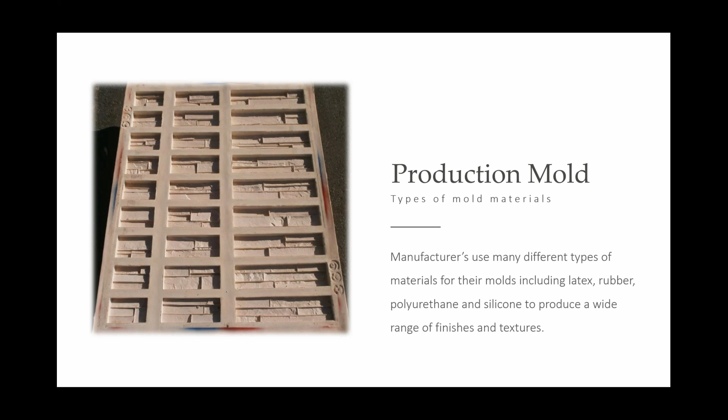After we make the mold, we apply some type of color to the mold, and that color is a pigment, an iron oxide pigment. Sometimes that's a liquid, sometimes it's a powder, and sometimes it's a combination of both. That can be either hand applied, like what you're seeing here in the picture, typically done for more of a realistic or artistic look, or it can be done by a computer or a hand sprayer, just depends on the manufacturing process that the particular manufacturer has in production.

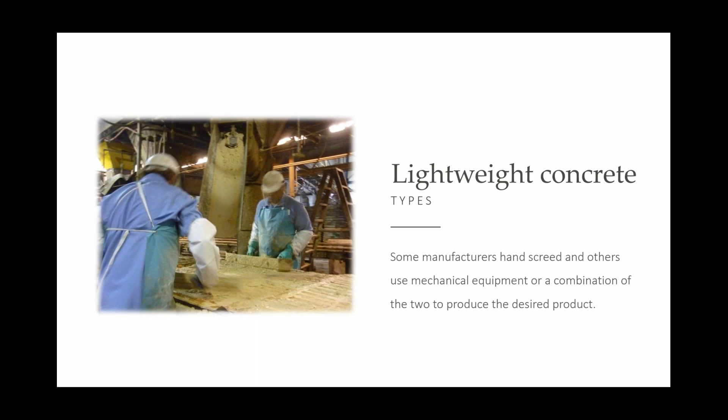After we do that, we apply our lightweight mix of concrete, and then it gets screeded either by hand, by machine, or by both. And that gives us our finished product, in this case a piece of panelized manufactured stone veneer.

Stone types - there are many different types of stone out there, especially in manufactured stone. We are able to create some looks that you can't get with natural stone. As you see in the pictures, we can manufacture anything from individual stones to panelized systems to large formats, and even the very popular brick looks.

So, manufactured stone versus natural stone. Depending upon what part of the country you're in, manufactured stone veneer is typically going to cost less than natural stone when it's put up into the wall. That may not be the case if you're sitting right next to a quarry in terms of raw materials, but by the time you install it by the proper methods, it's typically going to be more than manufactured stone up in the wall.

Manufactured stone is more streamlined, and it's a more cost-efficient installation with regards to waste factor. There's not as much scrap on manufactured stone because pretty much every piece of material that comes out of the box gets used, whereas in natural stone, not everything gets used. Manufactured stone veneer typically goes up faster than natural stone, simply because you're fitting natural pieces as opposed to something that we manufactured.

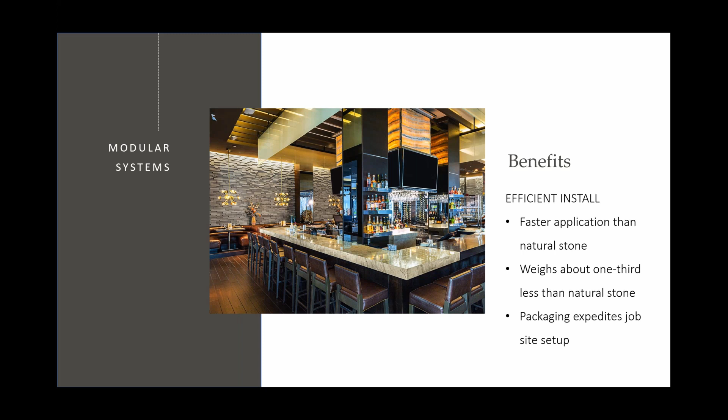Accents and details: when we're comparing manufactured stone to natural stone, there may not be as many accent and detail pieces available for natural stone. So manufactured stone has come up with all kinds of sills, caps, and electrical outlets and boxes, especially for commercial applications, to give that finished look. All of these pieces can be used in commercial and residential applications.

Quality in manufacturing: when we manufacture our own products as manufacturers, we're able to control that manufacturing process. Packaging becomes important because manufacturers want to make sure the packaging is part of your materials specification. This ensures that stone arrives to your job sites intact and ready to go. You can also specify in your specifications, if you'd like, either small or large box quantities based on your job site conditions.

When comparing some materials that are out there, and comparing some manufactured stones to others, sometimes you'll get rust spots where the aggregate quality control was not controlled properly by the manufacturer. You want to make sure you're working with a well-known manufactured stone producer who's got quality controls in place.

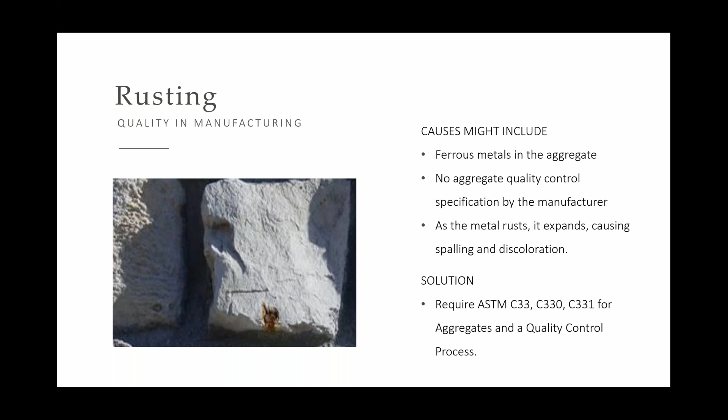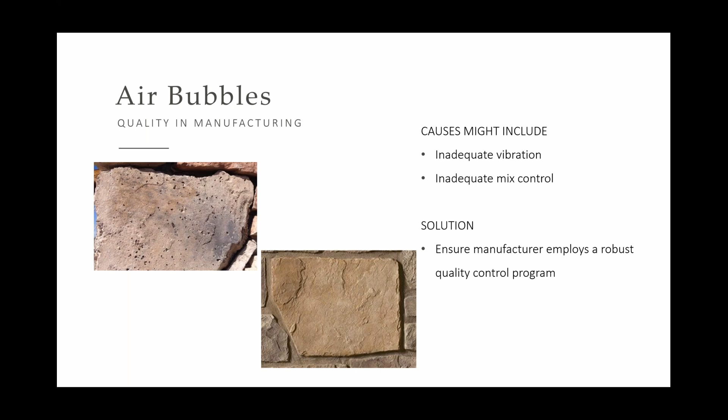The solution there is to make sure that you have quality controls in place, and work with a well-known manufactured stone veneer company. Some other things to look out for: lower quality manufacturing processes.

Sometimes this is regional instead of national manufactured stone veneer companies - they don't have the same number of molds. So when we looked at those production molds earlier in the presentation, the more production molds you have, the more ability you have to create more individual looking types of stones for a more natural and authentic appearance.

Make sure that when you're specifying your projects, you request confirmation from a manufacturer that they've got availability of a large number of master mold fleet.

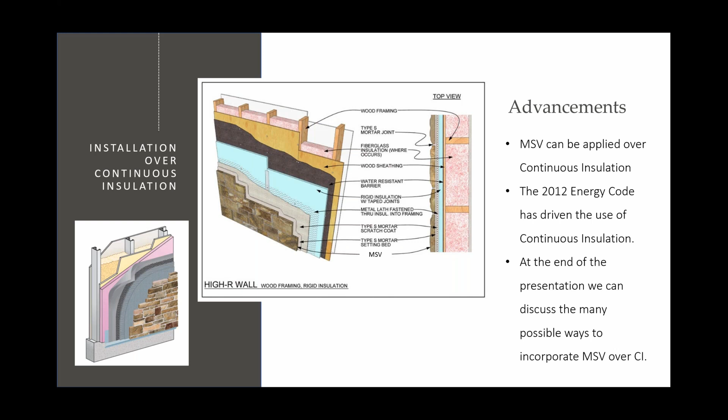When designing for success, we also look at how manufacturers are adding more recycled content. We're pulling materials regionally, as close as possible to the manufacturing plant. Many plants use reclaimed water and low emitting materials. As manufacturers, we're doing what we can to create products that are healthier for the environment, have more recycled content, and are better overall in quality.

Let's take a look at some of the building codes. We always refer to the NCMA MSV guide—that's the National Concrete Masonry Association's guide. If you haven't seen it, you can pick one up through most manufacturers' websites or directly from the NCMA.

This guide covers all the different ASTM codes you need specified within your commercial projects. It has detailed drawings for pretty much anything, from flashings to how to install different products side by side, and all those little details you'll need. I'd suggest grabbing one of these NCMA guides—you can download it right to your computer and keep it there for whenever you need it.

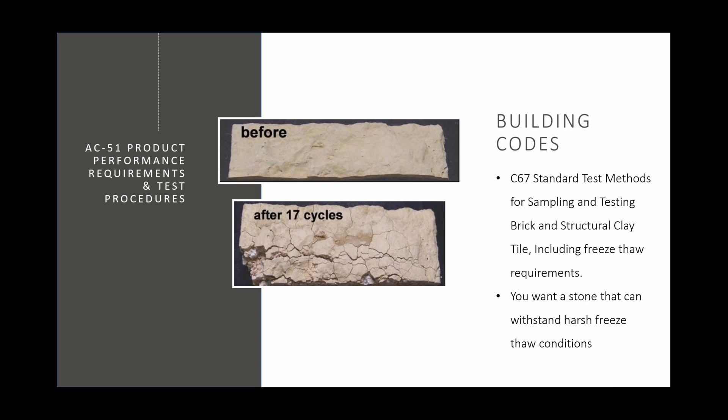Every fantastic piece of manufactured stone veneer out there from a national company, and even some regional companies, will have products that can withstand harsh freeze thaw conditions. We sell manufactured stone veneer all across the United States and Canada that will meet these requirements and withstand snow, ice, rain, etc.

So make sure that when you're out there specifying, include that AC 51 within your specifications.

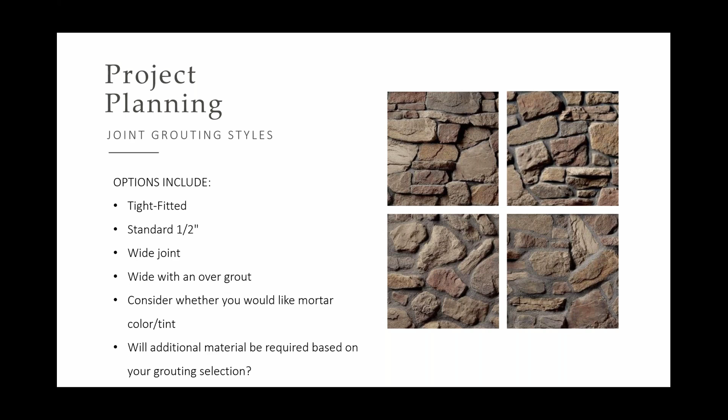Keep in mind that stone direction can also change the look of a project. You can have a random placement of individual stones, or you can lay that exact same material horizontally, and it creates a completely different look. This is all up to you guys to decide and make sure that you've included it within your specifications.

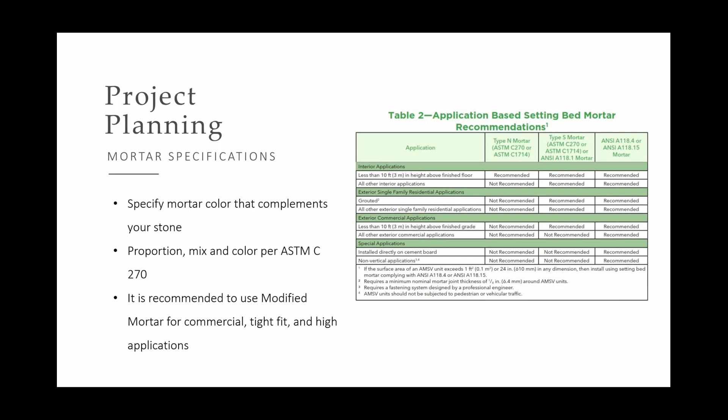When you're planning your projects, it's really important to include the types of mortars that you want. Right now, our requirement is to have a mortar that meets a minimum of ASTM C270 — that's your type N and your type S mortars. We'll talk a little bit more about mortars in further detail, but we want to make sure you're including ASTM C270 for all of your applications, or even better.

The importance of a mock-up. When you guys are project planning and putting things together, we can't stress, as a manufacturer, the importance of a mock-up. It can be a small mock-up or an extremely large mock-up, but it's a good idea to have one on the job site, even for large residential projects. It gives you an idea of the material, the terminations, where the grout is going to be, how thick that grout is going to be, the colors of the grouts. All of these things can be determined ahead of the project so we know exactly what the end result is supposed to look like on the job site, so the general contractor or the builder knows exactly what the finished product is supposed to look like.

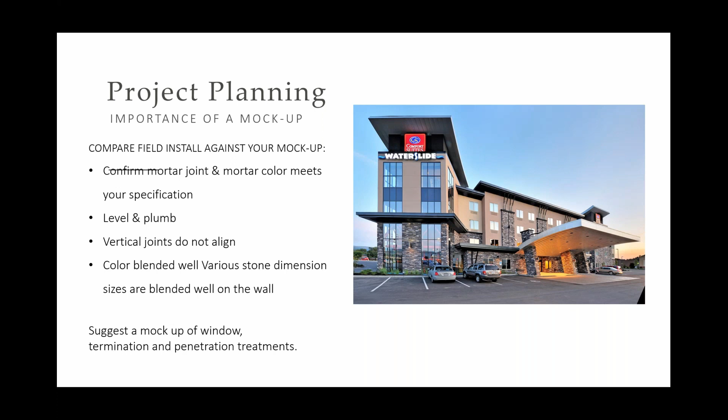It's a good idea to have the mock-up because we can look at the penetrations, we can look at the terminations, we can look at flashings — we can check and see all of these things ahead of time so that we can have a proper installation.

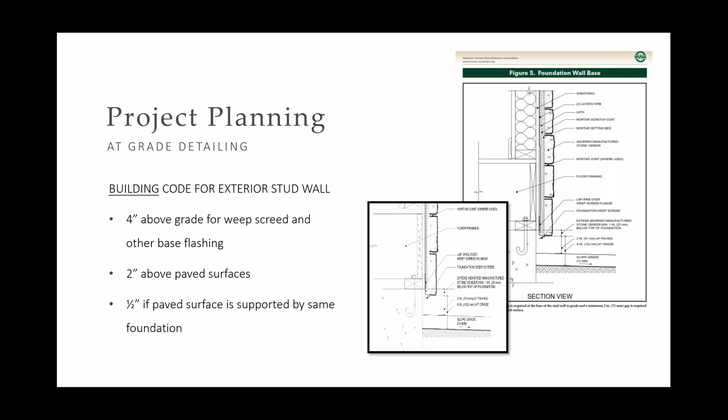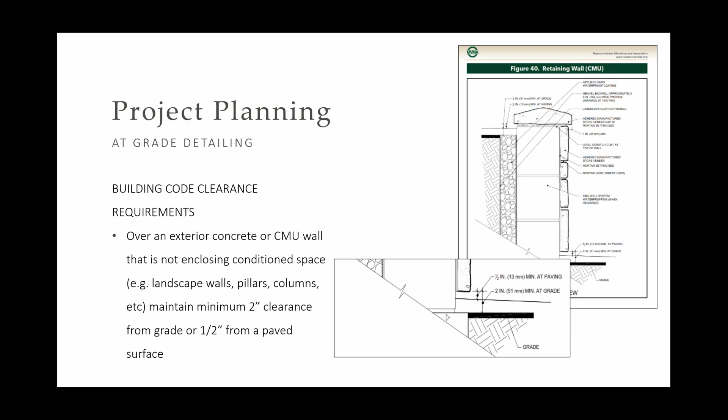Another thing for your specifications, and for general knowledge when project planning: we want to make sure that our stone, if it's going to be above grade, includes a weep screed with a minimum of 4 inches to grade, or 2 inches above a paved surface. We can get away with a half inch if the paved surface is supported by same foundation — more on that in a few minutes. We want to make sure we've got these in the specifications so we know the end result is going to be per code, and that we've got that clearance.

This is an example of a termination at a foundation wall or a bump wall, where we can get away without having to take the stone above that 4 inch or 2 inch clearance to grade, and it allows you to get that concrete-type look with your stone.

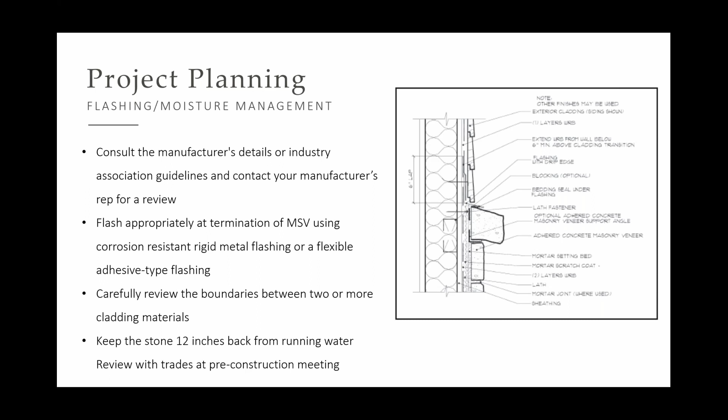This is some detailed drawings showing the flashing and tie-ins needed on a particular project — an idea of how we manage that moisture. All of these drawings can be found in the MVMA guide I mentioned earlier.

Some other considerations for project planning: sometimes people want to put sealers on stone. We don't recommend a sealer, but if you want to use one, make sure it's the right sealer, and we recommend checking with your particular manufacturer, because some manufacturers won't let you seal their materials at all. Efflorescence — certain products have efflorescence at certain times of the year because moisture is pulling back through the wall and through the face of the stone, depositing that white substance you sometimes see on the outside of brick or manufactured stone veneer.

Installers. Sometimes installers are very important to the project planning portion of a particular project, and then long-term maintenance, specifically in retail or national account situations.

When we're talking about protective treatments, sometimes people want to use those because they can increase resistance to stains, but they may also darken the color and slow the water penetration back out through the face of the stone. Our stone as manufacturers needs to be able to breathe on the wall so that when it gets wet, that moisture can evaporate back out through the front of the stone.

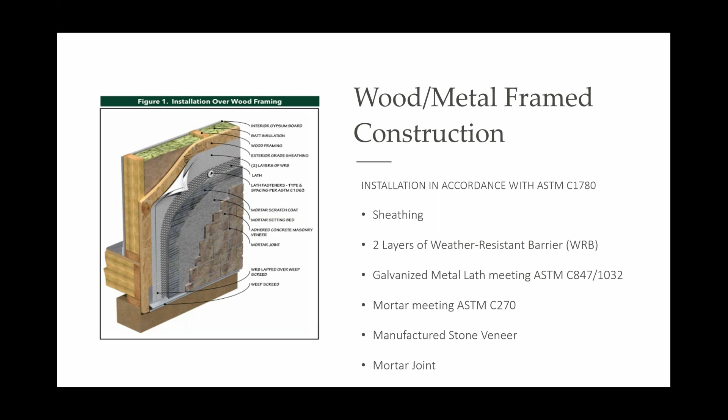When we talk about basic installation, there's some things we need to follow, and that is again ASTM C1780. We're going to have some type of sheathing on the back, two layers of a weather resistant barrier, our galvanized metal lath that's going to meet an ASTM C847 or an ASTM 1032 requirement, and mortar that meets ASTM C270. Then we're going to apply our manufactured stone veneer to that, and then we're going to mortar that joint. This is a fairly typical wall detail that you might include in one of your drawings.

Something that's not usually included in the drawings, but that is highly recommended and something for you guys to know when you're out on a job site checking an installation, is that we need to run our metal lath in a particular fashion. We need to run it horizontally, not vertically. We want to overlap our corners like you see in that picture by at least 12 inches so that we can tie into the framing. We also want to make sure that we're anchoring that metal lath 6 inches vertically and then every 16 inches on center into that particular metal or wood stud.

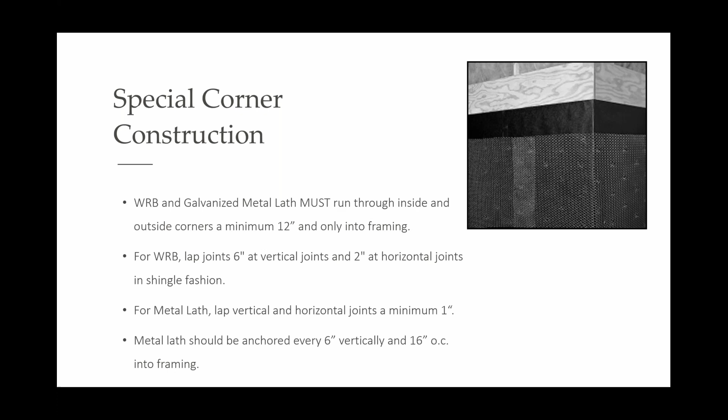So this is a pretty typical installation that you'd see on a corner, and one that you should find out on your job sites.

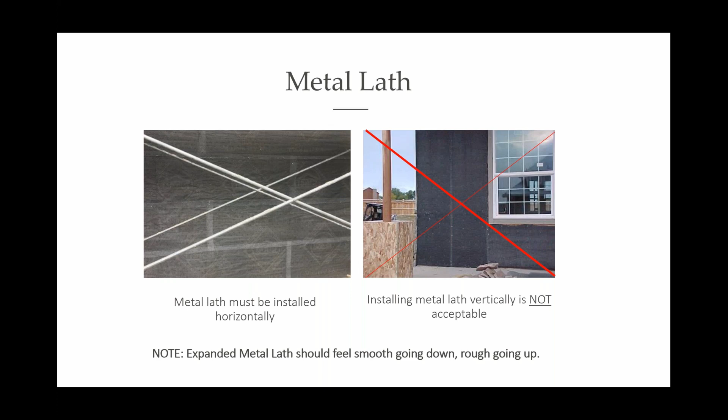You've got spacing also in between those gaps. Your metal lath should feel smooth going down when you rub your hand over the top of it, and rough coming up because it's got those cups in there. Those cups are designed to hold our half inch layer of mortar.

So, weather considerations when we're out there installing: we want to make sure that when we're working in hot and dry climates, our scratch coat is misted with a fine spray of water. That's going to help our mortar not flash off too quickly.

In terms of cold weather, we want to make sure that we're installing our projects in temperatures that are not below freezing or very close to it. So right around 40 degrees Fahrenheit, which translates to about 4 degrees Celsius. Below that just causes issues with our mortar.

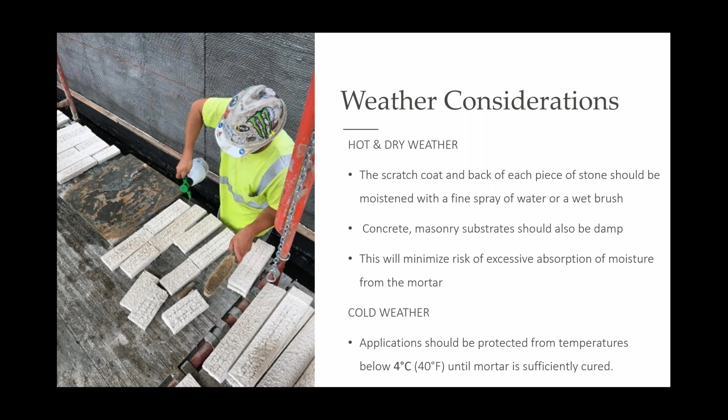When we install our mortar, whether you're out on a job site or following up on a project, we want to make sure that we're using a full half inch coverage all the way around that stone, and then pressing that stone onto the wall and squeezing out the excess amongst the edges.

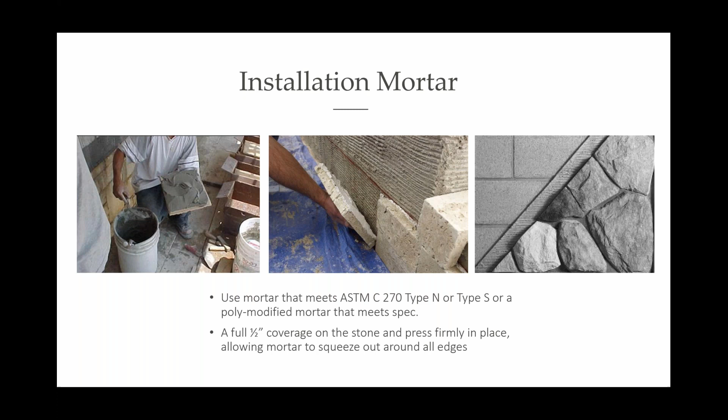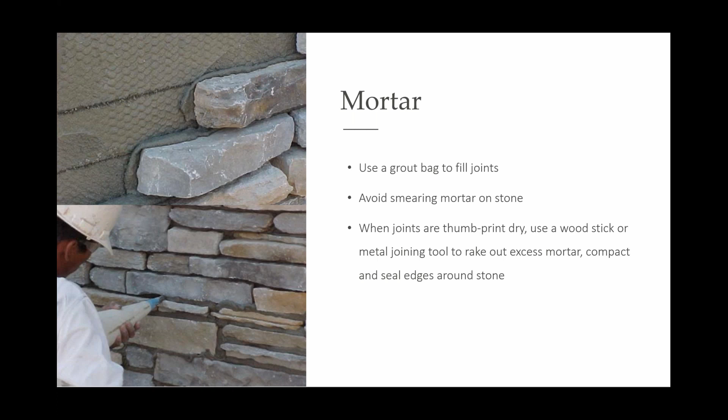After we're done installing, we're going to come back with our mortar and fill those joints in. This is a fantastic installation approach in cold weather environments. It works really well to have projects mortared in as opposed to a tight fit with a single stone.

If we're going over concrete construction like a CMU, it's always a good idea, but not a requirement, to shoot the traditional metal lath in there. That way we can minimize any cracking on the job.

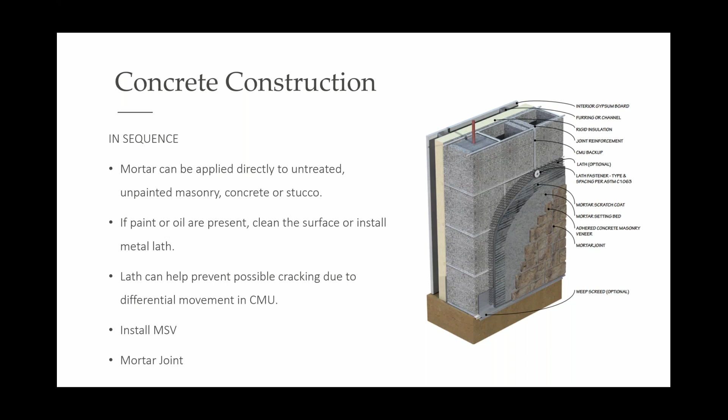Cement board: if you're using cement board, you can use cement board. It's often used on commercial projects where it allows for a faster installation. Sometimes we're using a liquid applied water barrier, and cement board lends itself well to those applications. Make sure that it meets ASTM C1325, that it's a true cement board and not the HardieBacker type board.

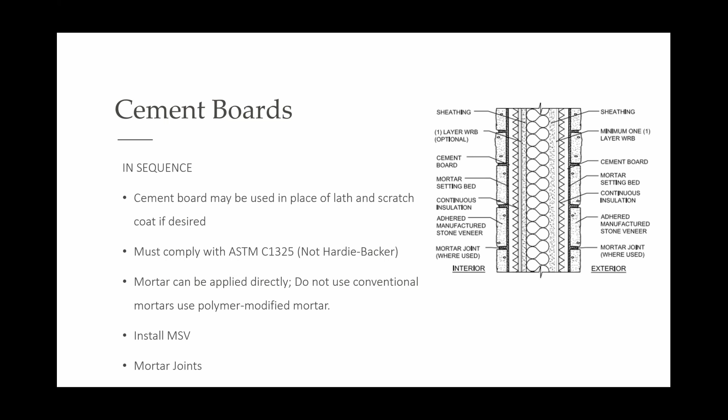Moisture control: we want to manage our moisture on the job site as well as we can. We're moving into some newer systems with rain screens, and some systems where the rain screen and the lath are all in one combination. Some of these rain screens are required in certain areas, so please be aware of that as you are specifying your projects.

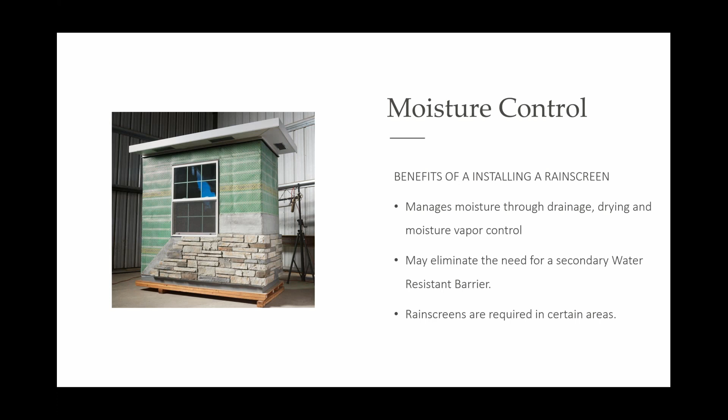We're going to talk about large dimension stone veneer. When you're working with large dimension stone veneer, which is becoming more and more popular on job sites because it lends itself to a really modern look, we want to make sure that we're following the manufacturer's recommended installation instructions. Almost every manufacturer producing large dimension stone veneer will have special instructions that the masons should be following, and those should also be included within your specifications.

Inside or outside, there are different installation requirements. It's always best to get with your local vendor rep from the manufactured stone company, or the dealer or distributor representing those products, and make sure we're following all of the recommended manufacturer's installation instructions.